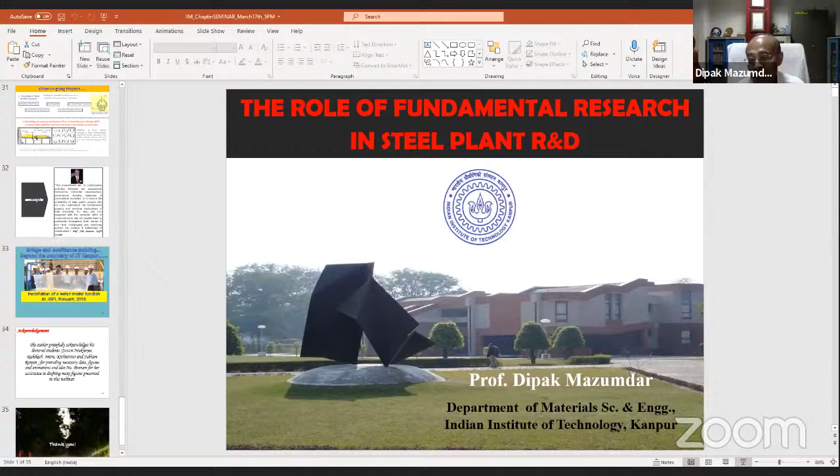As I project my slide, I'd like to say this talk is structured in three different segments, split over roughly equal duration, about 10 slides each, and I should be able to wind up in about 30-35 minutes or so.

This is the beautiful backdrop of the institute. I have projected the institute's logo throughout my slides at the top, because it is the name of the institute that has given me perhaps everything, including a holistic lifestyle in this wonderful campus.

If I move to the next slide, these are the three segments I was talking about. I will address our industry-supported steelmaking research activity at IIT Kanpur, briefly mentioning since when we started associating ourselves, which industries we cater to, what are the subjects, what is the goal of the research, and so on, for about 10 slides or so.

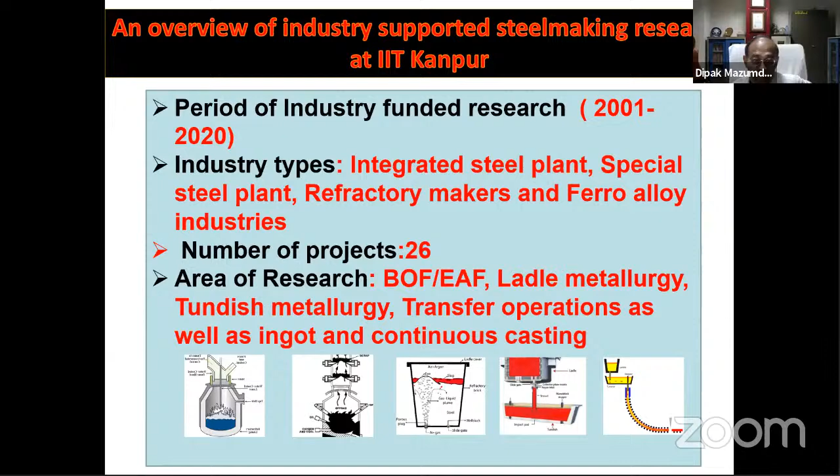If you look at our major collaborators, you can see there are several steel plants. These are our principal collaborators, meaning we have been funded by them with more than one project. For example, industries like Hospet Steel, JSPL, and Rashtriya Ispat Nigam have funded, I think, more than 4 or 5 projects each.

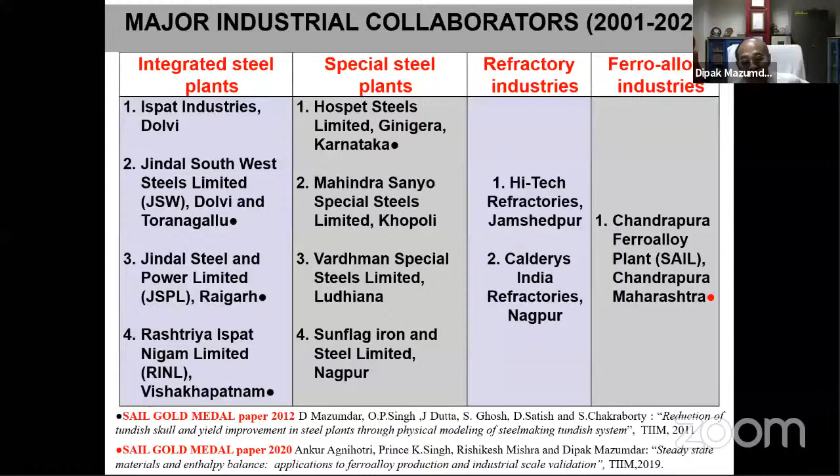These projects were not only challenging, they are very creative also. It is evident, as indicated below the table, that two of the works culminated with SAIL gold medals, which shows these are not mundane research. I do not have the time and scope to address each of these, but the two cases I deal with subsequently will give enough indication that these are indeed doable problems, challenging problems, and at the end of the day beneficial for both the professor and the industry.

The goal of the plant research has been, because it's an engineering activity, and engineering activities are concerned with wealth generation. If the exercise fails in generating wealth, it is a meaningless exercise as far as steel plants or any other industry is concerned. Because we are professors, we have to blend this business goal with an academic goal, and come up with projects which give us that intellectual feed essential for our survival.

So with a goal of enhancing steel mill production and process performance more specifically, we have addressed projects related to different topics: yield loss reduction, product cleanliness improvement, process time reduction, process optimization beyond yield loss, and energy as well as material audit.

These were not designed by me; these were industry-driven projects. They proposed the goal, and I had to deliver in a time-bound fashion. You can see I have put the logo of most of the steel industries with whom I have collaborated extensively, including primary integrated steel mills, special steel mills, and refractory mills.

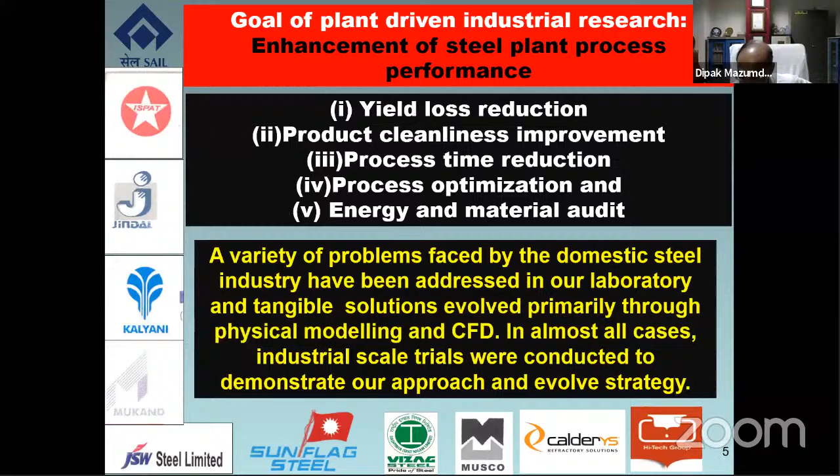But apart from these industry-funded research projects, I would like to mention that we have trained more than 800 shop floor engineers through continuing education activities that I had in Kanpur. I think this is a remarkable feat.

I would consider this more important, because as a teacher, I really enjoy delivering lectures before people who are working on the shop floor, who did not have a chance to see an excellent academic environment in an institute. I could bring them over, and the company funded them, sparing them for 2, 3, 4 days.

Today, I am very grateful that industry has stood solid behind us in supporting not only the research which culminates into money, but they have realized that generating knowledge is very important. Training their manpower and keeping them right at the front is very important. I think professors like us have a great role to play in taking the Indian industry forward, as far as the knowledge bank is concerned.

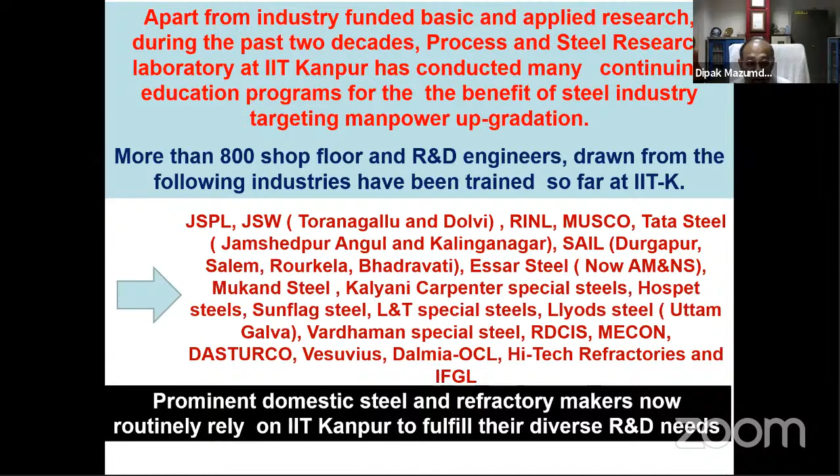If you superimpose the people who have come to IIT Kanpur from different organizations on a map of India, you could see that from throughout the country, people have come to take advantage of the expertise available at IIT Kanpur. I feel really privileged that in the last 20, 25 years, the industry has stood rock solid behind my activities, supporting industry-funded research as well as continuing education activities.

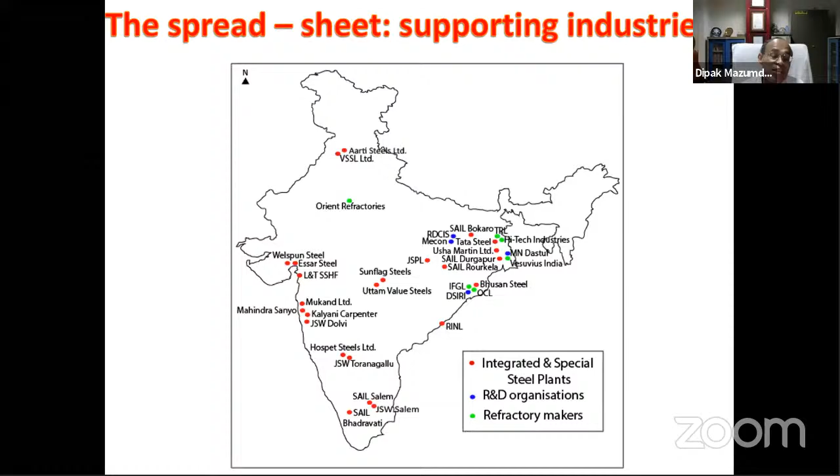Now, although we have done a lot of these exercises, I must mention that there are certain prerequisites in order to fulfill the ambitions and aspirations of the industry. It does not happen spontaneously. If you go to the next slide, we could see that for translational research, knowledge of manufacturing, measurements and modeling we consider as a prerequisite, or subject knowledge, which really is essential.

On top of that, it is very important to have a good modeler or researcher, not just one, as I'll show you in the subsequent slides, along with the necessary knowledge base, without which the concentration gets disturbed.

Professor Singh, could you mute everybody?

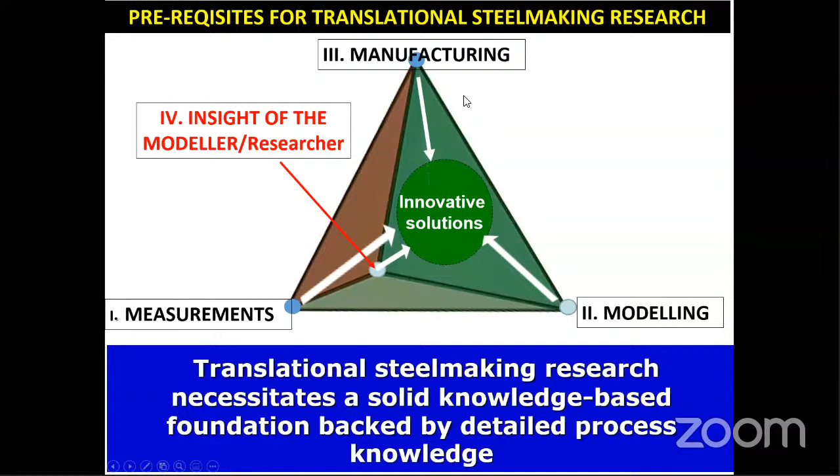For industrial research, to do translational research, I think a good knowledge base is necessary. That knowledge base is constituted by knowing the manufacturing details, which is steel making and allied subjects, having good idea about measurements because you have to carry out high temperature measurements, and also a reasonable expertise in modeling. Perhaps the insight of the modeler plays a great role here.

You may have noticed that when Professor Singh read my biodata, he said that I joined IIT Kanpur in 1987, but the first industry-funded serious project started in 2001, which means I had to get some experience. I had to lose a few hairs or turn my hair gray before the industry developed confidence in me. So that's what I meant.

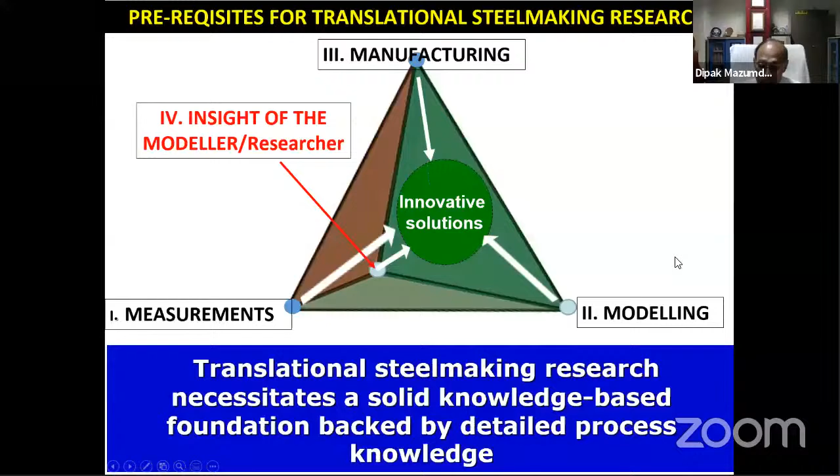With age comes experience, and that experience is very important as far as the insight of a modeler is concerned, combined with good subject knowledge. This is what it is: you have good knowledge of manufacturing, you have the science base of steel making, thermodynamics, metallurgical kinetics, and fundamentals.

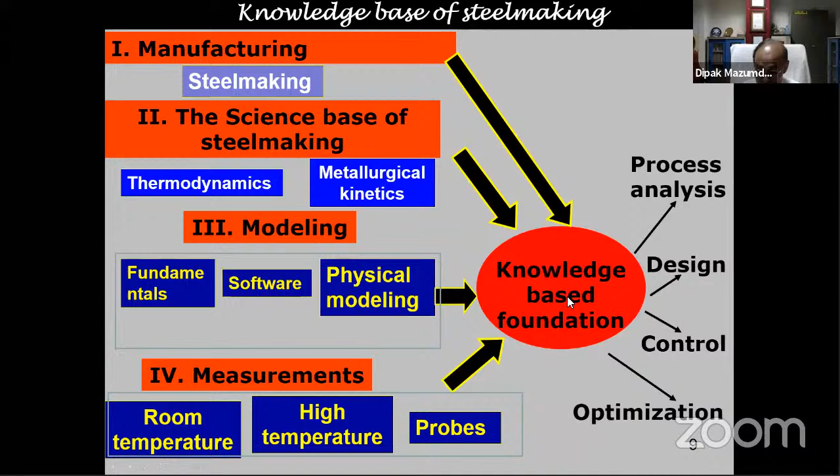These slides I have shown in many places. This knowledge base is necessary as a prerequisite for the researchers or the team of researchers. If you sum it up, you can do translational research and fulfill the ambitions of the industry and your own ambitions, provided knowledge, experience, adequate plant exposure, and a dedicated team is there. Without which, you will not be able to do any meaningful R&D that caters to design optimization and control of steel making processes at the industry scale.

So with this background, it is worthwhile to look into the two problems. I would like to summarize here that we have been able to do a lot of industry-funded work related to industrial production, etc. The support of the industry is very important in this.

I think professors have a great role to play here. Sitting in the office, I have realized, will not bring any industry closer. Once you start visiting the industry and become part of the team, that's how the confidence building starts. That's how the industry starts to realize your abilities, and that's how the industry opens their doors.

With their support only, I could make the steel industry a large full-scale laboratory for my research work, and it has been extremely gratifying. I would like to mention this specifically at this moment.

If I don't acknowledge here publicly the support given by the Ministry of Steel throughout my professional career, and the support extended to me by the domestic steel and refractory industries, I would have been nowhere. So I sincerely acknowledge their assistance in shaping my professional career in this country.

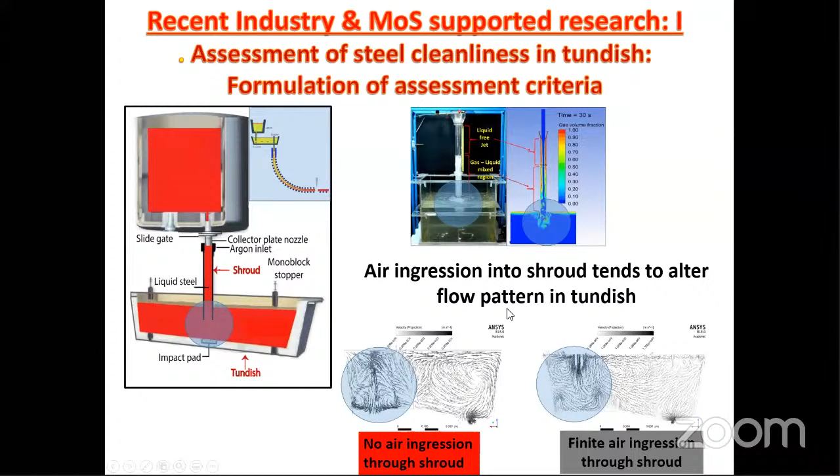So there's huge interaction between the atmospheric air and molten steel possible. And this molten steel is deoxidized, so it does not contain much dissolved oxygen. Apart from that, when air ingression occurs, there's a reversal of flow that takes place below the Tundish.

But that's not what I'm going to talk about. It's not so important as far as cleanliness of steel is concerned; it has only secondary influence. Nonetheless, the buoyancy exerted by entrained bubbles could disturb the flow, and this has been captured very realistically by carrying out numerical simulation. But that's not the entire story.

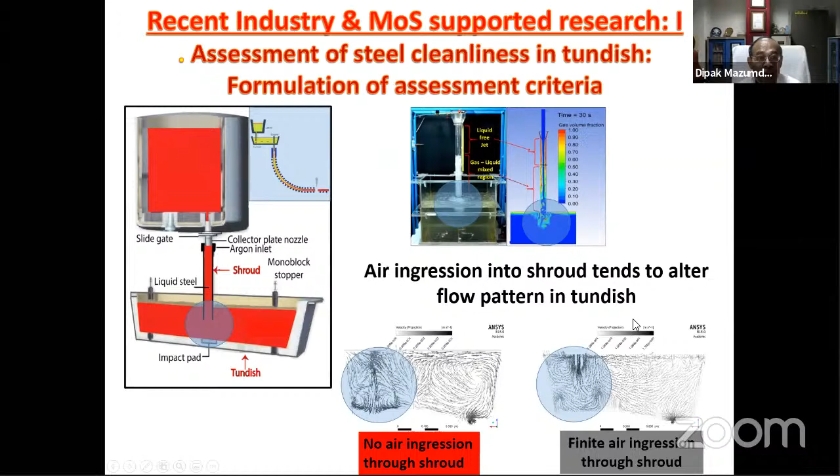Air ingression, when it takes place, the oxygen from the atmosphere gets dissolved in the melt. This dissolution is driven by a concentration gradient, because atmosphere contains oxygen at a partial pressure of 0.21 atmosphere, and steel could be containing 10 ppm, 15 ppm oxygen depending on the extent of deoxidation.

And the dissolved oxygen, when it exceeds a critical value, particularly in aluminum steel, it can react with aluminum to form alumina. This is a solid product, and this solid product acts as an inclusion unless it is removed.

Parallelly, you have dissolved aluminium, and if air ingression does not take place, we have Tundish powder, which contains silica. Silica is a less stable oxide, so aluminium reacts with silica through slag-metal reactions, as a result of which alumina is produced. So alumina can be generated in steel, and the cleanliness of steel can be impaired in the Tundish. So these are the reoxidation reactions.

As you can see here, I have plotted industrial measurements which show that the dissolved aluminum content at the VD lifting station is higher than the dissolved aluminum content at the solidified bloom. This axis is 400 and 400, and this is the 1:1 line. The points above the line essentially imply that we have more dissolved aluminum at the VD lifting station than at the solidified bloom, which means aluminum has undergone fading in the Tundish, or dissolved aluminum has been removed from the Tundish itself.

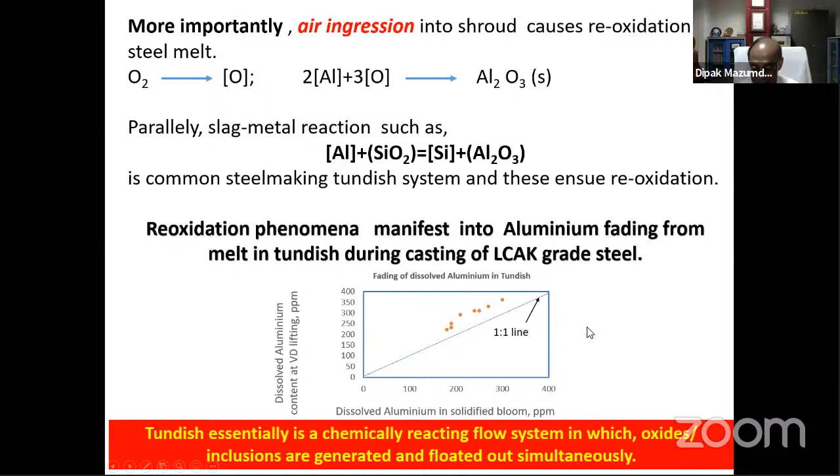So treating Tundish as an inert reactor is a gross simplification. I think we are in the 21st century, where steelmaking is 160 years old, and it is perhaps time to take into consideration the exact nature of the reactor in order to deliver what is required to be delivered.

Now, most of the time, we as academicians have compared Tundish designs by a popular way: using the residence time distribution curve, where we inject a dye, find its residence time distribution, get it done for two different Tundish designs, and then evaluate these curves to consider which Tundish has a better inclusion flotation capability. But this is not right, because it does not capture one of the intricate features of Tundish operation, which is reoxidation. So my assertion is that you can get a rough idea, but this is not going to be the true picture, or it can even be misleading in some cases.

Similarly, the cleanliness index in the steel industry, or flotation of non-metallic inclusion, is determined using this criteria. When we say aluminum insoluble, what does it mean? It means Al2O3, which is solid. In the bloom, divided by the aluminum insoluble or alumina content in VD, which means that if aluminum insoluble in VD equals aluminum insoluble in bloom, no inclusion has floated and the cleanliness index equals 1.

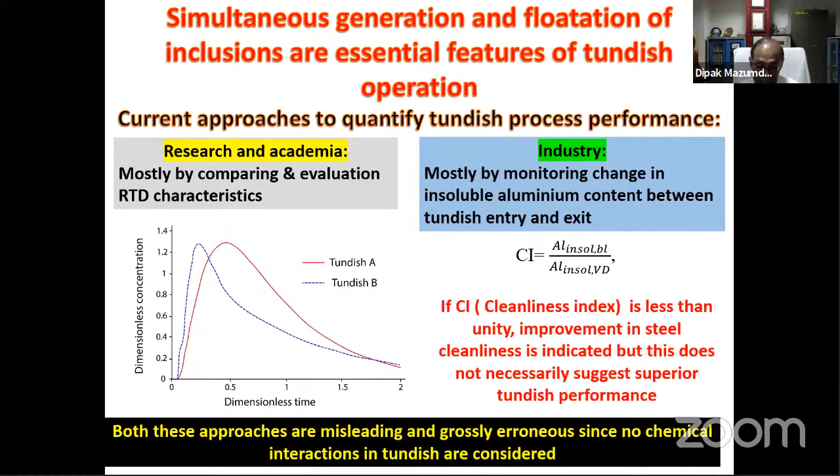But again, this has nothing to do with the reoxidation that takes place. So whatever academicians have been doing, or industry people have been adopting, to quantify Tundish process performance is not adequate, and we require better criteria in order to quantify Tundish process performance, particularly its ability to float inclusions.

When you do tundish processing, look at this figure showing dissolved nitrogen content in the tundish at the Vd lifting station for two different grades. As tundish filling starts, the dissolved nitrogen shoots up and then attains a steady state.

This indicates air ingression is taking place, because absorption of nitrogen essentially indicates that the melt has come in contact with the atmosphere. Along with nitrogen, a varied amount of oxygen also gets absorbed by the steel. Parallelly, as oxygen gets absorbed, we see aluminum fading from the steel and alumina generation, as shown in the earlier figure.

Now consider this process of alumina generation, particularly for aluminum-killed steel. By carrying out a simple high school level material balance, you can find three parameters: the generation index, the flotation index, and the total alumina loading in the tundish.

The total alumina loading in the tundish relates to the generation of inclusions, because whatever dissolved aluminum has faded, that delta has manifested as alumina formation. Similarly, the flotation part is a separate component. If you divide whatever has floated by the total inclusion loading, you get the flotation index, and these indices vary from 0 to 1.

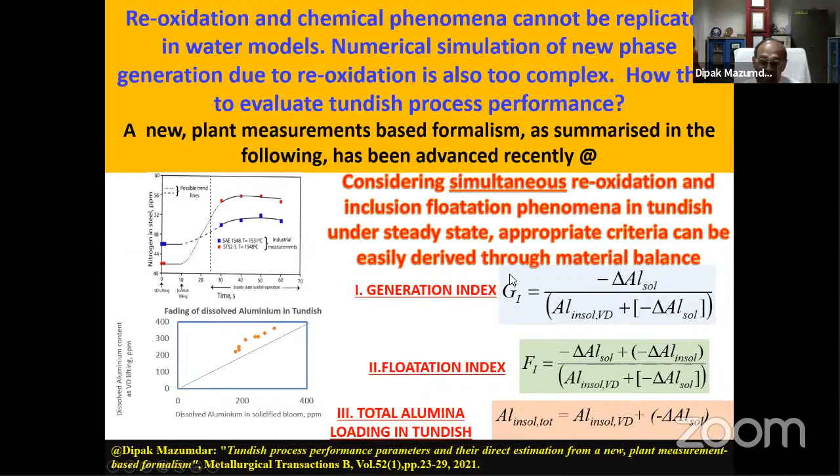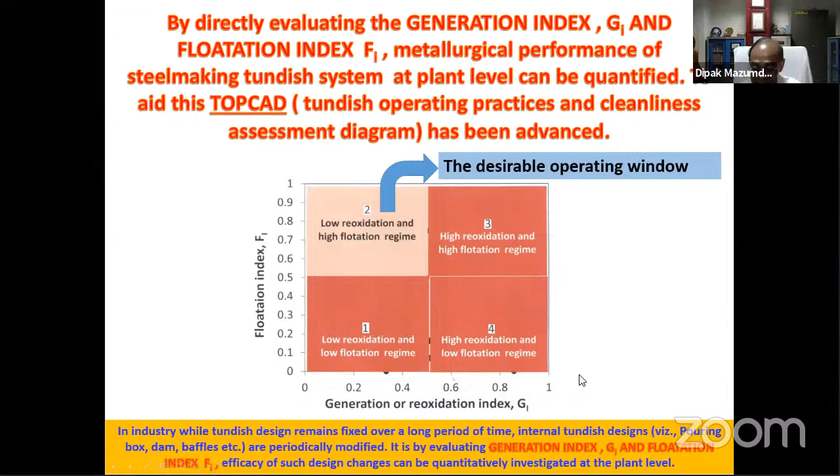If you plot industrial data from Indian steel plants, the figure is alarming. Only a few points fall in box number 2, while the bulk fall in box 3, the region of high generation and high flotation, which tells us the tundish is not working well as far as reoxidation is concerned. High flotation is there, but so is high generation, meaning reoxidation is a big problem in the Indian steelmaking system.

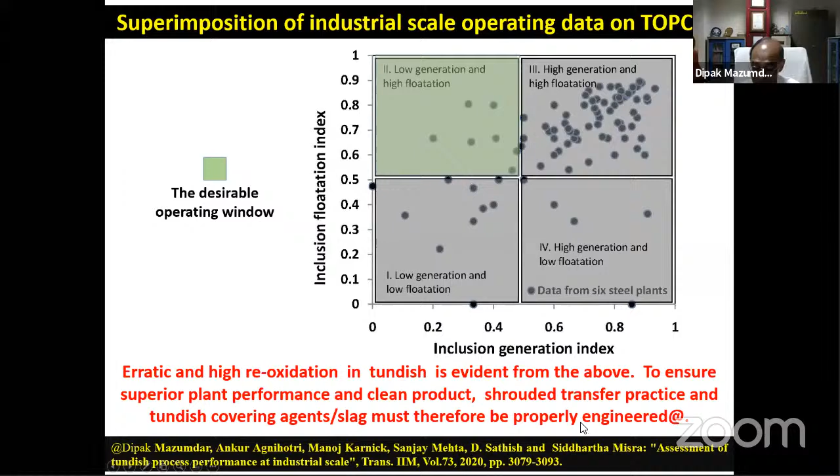This is recent work published in association with six different steel makers in the country. If you compare, for example, three special steel plants of the same size and capacity, there is quite a bit of difference in total inclusion loading—a huge range—showing that these plants are not able to control their process well. Otherwise, this value would have fallen in a narrow range.

Similarly, some steel plants are relatively better than others, where generation in the tundish is significantly higher. So we can draw a series of conclusions from the formulae advanced in this work.

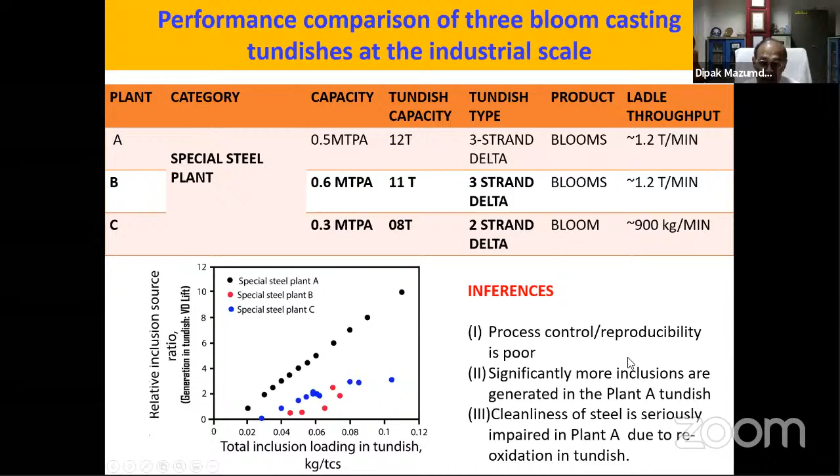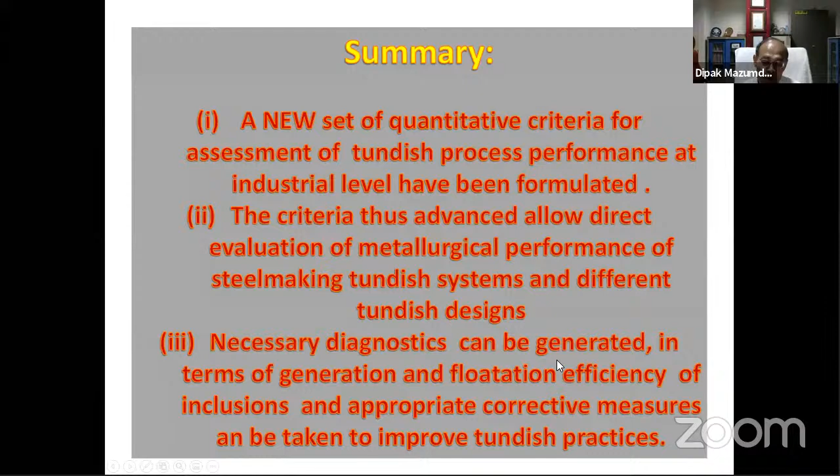I would like to summarize this by going to industry, visiting plants, making industrial measurements, and invoking a tundish level material balance with some process knowledge. We have formulated a new set of quantitative criteria for assessment of tundish process performance, which allows us to compare realistically different tundish designs and the performance of different tundish systems.

This is an interrelated part. Now we are looking globally at the tundish. Let us now look locally at the tundish shroud and collector nozzle joint, which I have highlighted here, and see what happens.

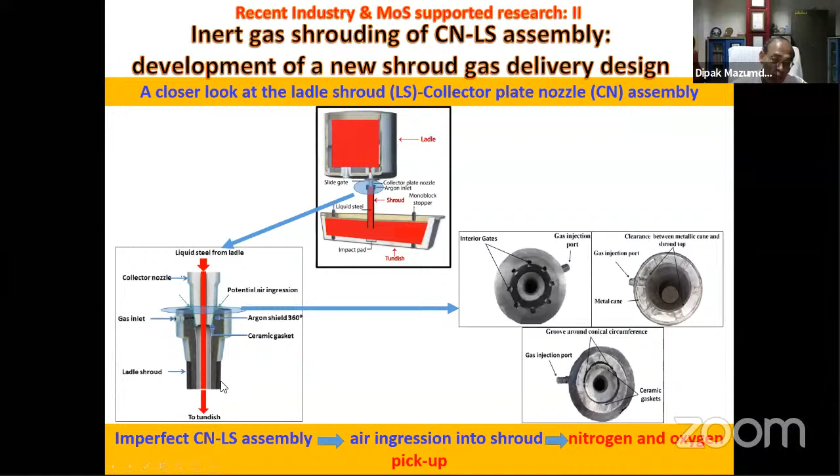This is the joint between two refractories, and this is the ladle shroud which is mounted onto the collector nozzle. You can mount it with a robotic arm, or you can have some kind of manipulator who can force fit the shroud into the collector plate nozzle.

If you look at this joint, it may not often be perfect. As a result, when you inject gases here, this gas tends to get distributed around the shroud collector nozzle joint. This gas is inert, and presumably provides some kind of shielding effect.

Here you can see the gas injection port. This design, the ladle shroud gas delivery design, is an 8-port design. Gas is injected here and comes out through these ports, resulting in a shrouding or circumferential distribution of argon around the shroud collector plate nozzle.

Similarly, there's another design, a metallic cane design, with a single discharge port and an external groove which allows argon to be delivered around the shroud collector nozzle assembly, so you do not get air ingression. If some gases escape, it will be argon, and that should not lead to reoxidation. That's the supposition—let us see whether it's legitimate.

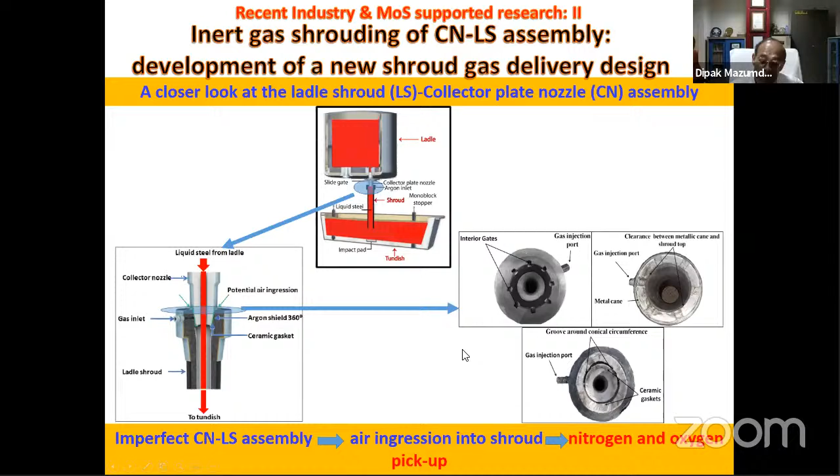An imperfect collector nozzle and ladle shroud assembly means air ingression is bound to happen, along with nitrogen and oxygen pickup, as we've seen in the aluminum fading graph illustrated earlier, leading to reoxidation. This is the collector plate, collector nozzle, and the ladle shroud, isolated here, with someone holding it off camera.

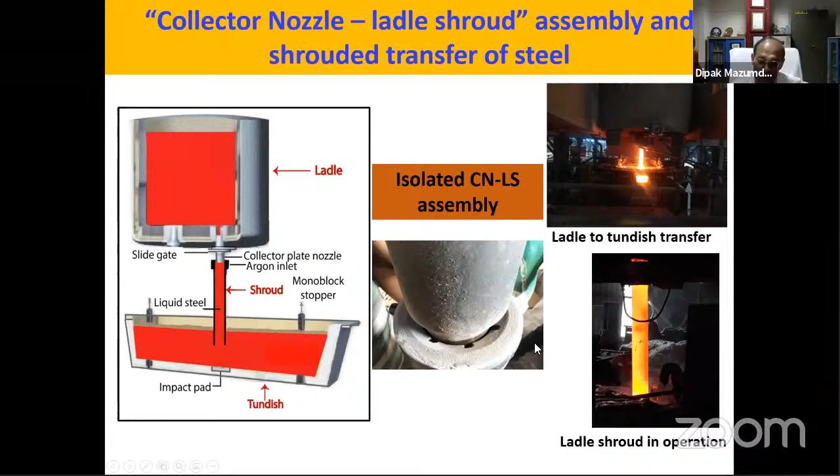This is the nozzle through which gas is injected, and through these ports the argon comes out. This shows the ladle shroud in operation in the steel plant, and this picture indicates how molten steel is transferred from the ladle into the continuous casting mould.

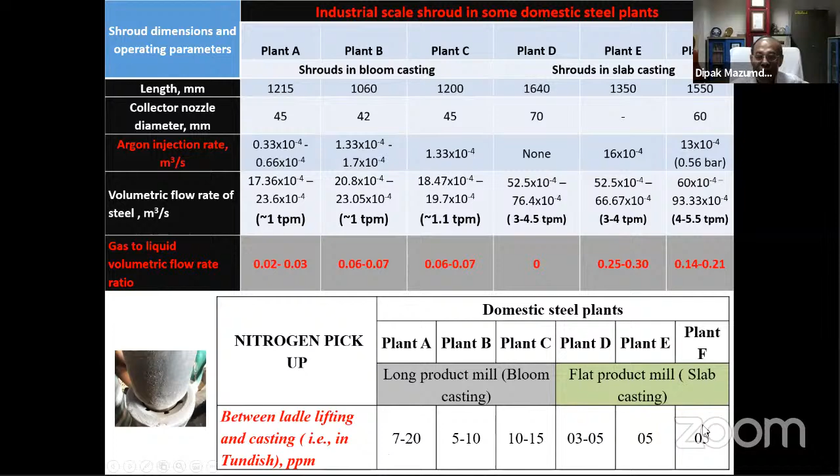You can see that regardless of whether there is no gas injection or varied gas injection, there is nitrogen pickup by the steel, which indicates that the shroud collector plate nozzle joint is rarely perfect in industry. Therefore some oxygen and nitrogen do get in, and this is manifested consistently across the 6 different steel plants considered.

To verify this, we carried out work—this is by my doctoral student—where we took cut pieces of ladle shroud of 3 different designs and carried out dye tracer distribution studies by submerging the actual shroud heads in a water bath, as indicated.

So you have the potassium permanganate injection system. You can say, sir, why are you using water as the fluid here, because it is argon gas? But we must understand that when you do simulation, if we maintain the inlet Reynolds number, whether it is air injection, water injection, or argon injection, if you maintain the similarity of inlet Reynolds number, then the curves overlap. The distribution of the gases or the liquid overlaps, as you can see here, which shows the distribution of water as well as argon. So we understand that we have to maintain that Reynolds similarity so that we can legitimize these water model studies.

But what it shows most interestingly is that, as we have found out, the argon distribution is not all with one port system. No matter what the argon delivery systems are, the argon distribution is far from circumferentially homogeneous. This part does not get any argon injection, for example. Here it is somewhat better, and here it is still better, but nonetheless there is no complete uniform encircling of the shroud collector plate nozzle by argon injection.

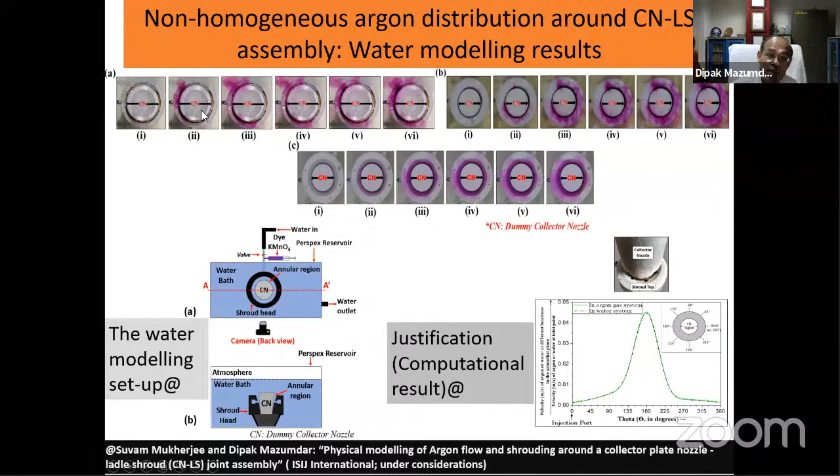So there is a problem here, and that problem is going to be much more serious when we are talking of this kind of shroud design. So to understand the air-water, air-argon distribution in an actual shroud system, you have a collector nozzle, and we have a ladle shroud. There's a section of it shown here. So gas is being injected here, and we want to find out, in this annular dome, what is the distribution of argon and air.

We have developed a model also, because these water model results may not be exactly applicable because the temperature effects, etc. are not there. So we have a species conservation equation which considers the distribution of two species in the system, air and argon. We have an energy conservation equation which takes into account the flow of gas in a hot shroud, because the shroud wall temperature could be something like 800 degrees centigrade. Then we have turbulent flow because the Reynolds number is high, and we have a 3-dimensional Navier-Stokes equation. We have calculated the flow distribution here and tried to find out the profile of argon, how much argon, and what is the distribution pattern of argon around this collector nozzle.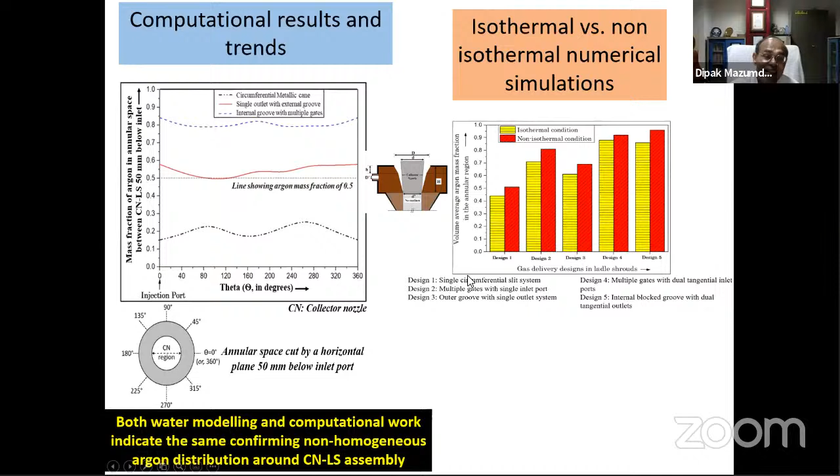So now if you try our new design, it gives us a significant enhancement, almost 95% of it. While these lines correspond to a single line, this is the volumetric average of argon in this annular region, so the total residual oxygen here is barely 5%. This shows that design 4 and design 5, developed in our laboratory by carrying out a large number of computational trials, tell us that the efficacy of argon distribution around the shroud collector nozzle can be considerably increased, and we can get almost the entire space filled with argon. That's what is desirable. Therefore, we conclude that gas distribution efficacy can be improved by changing the gas delivery designs.

I'll show you an animation, and then you can see, for example, how this blue essentially indicates that this is filled with air at time t equal to 0.

And now we have, when you start blowing argon through it, so argon is shown in red. You can see here, for example, this is one of the existing designs, and in the animation we don't get anywhere red except for this inlet nozzle, okay?

And if we plot here, this is our existing design versus new design, and you can see the rotational effect here. We have a tangential port here, so there is a rotation, and you can see the buildup of the gas. If you see, there it is green, which essentially means about 40-50% of it is going to be argon, and 50% is going to be oxygen.

On the other hand, if you look at the new designs, at this particular surface you have air present, so that's why you see some blue region, but bulk of that annular space between the collector nozzle and the shroud is red, which essentially indicates that this is filled with argon.

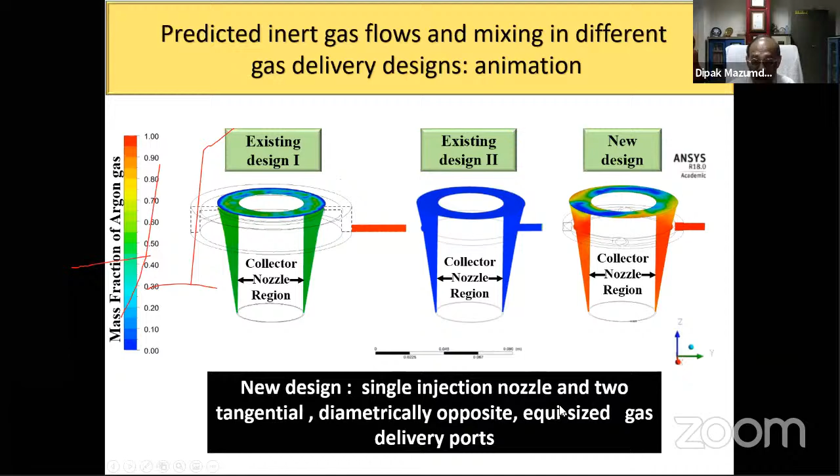And the summary of it is shown here: you have two different cases, the existing design, whether we go at the lower part, the intermediate part, or the top part, the existing design shows that nowhere is it a red region, there's only a little bit of argon, most of it is air.

On the other hand, the new design shows us that at the bottom part it is going to be red, or argon, at the intermediate part it is also going to be red, and somewhere at the top we can have about 90-95% of argon present there.

So it shows us that by changing the gas design facilities, which are very simple - this is not rocket science, this is high school level knowledge again - by reorienting the gas ports, the number of gas ports, their orientation, etc., one can really improve the distribution of argon around it.

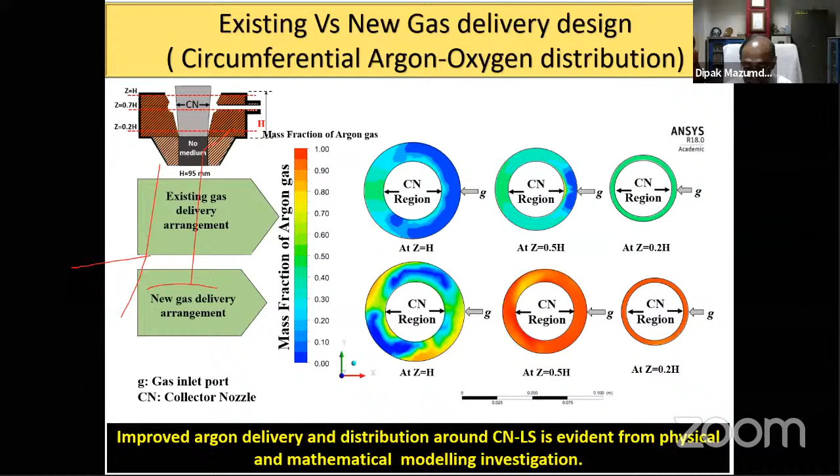So we have found this out in the laboratory. We have a design available to us, and now we are knocking at the door of the industry, and the industry has to come forward now to do this part.

And we found, fortunately, a nice partner, and that's what this particular work is about. The next two slides are going to cover this.

So we found a refractory manufacturer who was willing to make this refractory artifact, the ladle shrouds. We found a steel plant that was trying to minimize their atmospheric air absorption through ladle shrouds, so they were also keen to incorporate this shroud design.

So we made about 50 shrouds, brought them to our laboratory first, and we wanted to be sure that they could incorporate our design precisely. Having given the final clearance...

50 shrouds were manufactured by the refractory makers and shipped to the steel making industry, and they were deployed in trials. The trials were done in two different phases: one during the lockdown period, in November 2020, and the other during February 2021, which is still ongoing.

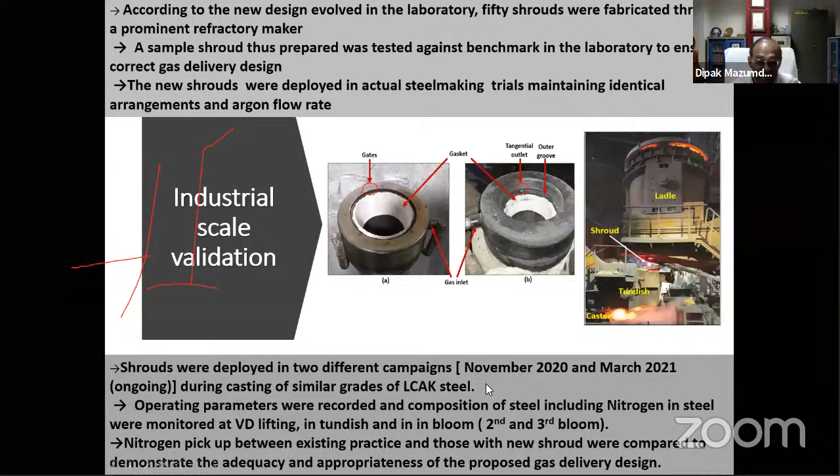And we monitored many things, including nitrogen absorption. All other process parameters were identical.

And if you look at the nitrogen - what are these lines here? I think somebody shared their screen at some point. Okay.

So this is the existing design. I have kept deliberately three figures: this is campaign one, this is the ongoing campaign, and this is the existing shroud practice. And this is the nitrogen pickup in Tundish.

I kept this axis deliberately the same, up to 60 ppm nitrogen. We have got a maximum of 55 ppm. And if you look at the existing practice, the average is about 25 ppm, and look at the scatter.

Now you go to the new campaign with our new shroud design: from 24.5, it has come down to 9 ppm. We have only done 9 trials so far.

These are the 18 points, the same set of points, where we have taken both Bloom 2 and Bloom 3 data, and that's why we have about 18 data sets. That's why you see this pattern being replicated here also - it's the same set of data, but with respect to Bloom 2 and Bloom 3.

This also essentially indicates that we have about 12 ppm of nitrogen pickup, because the data set is small. So I think this 12 ppm can go down further, to 8 or 9 ppm, once we have a larger number of data points and so on.

Now we must understand that at this particular stage, we have just changed our ladle shroud. There are two more things: the mechanical issues need to be sorted out, and the argon flow rate. I am sure once we incorporate these two additional aspects into steelmaking practice, the transfer operation from ladle to tundish figure can come down to 1 to 8 ppm, which is the global average. And that is the real challenge, which we will be working on in the next couple of months when I visit the industry.

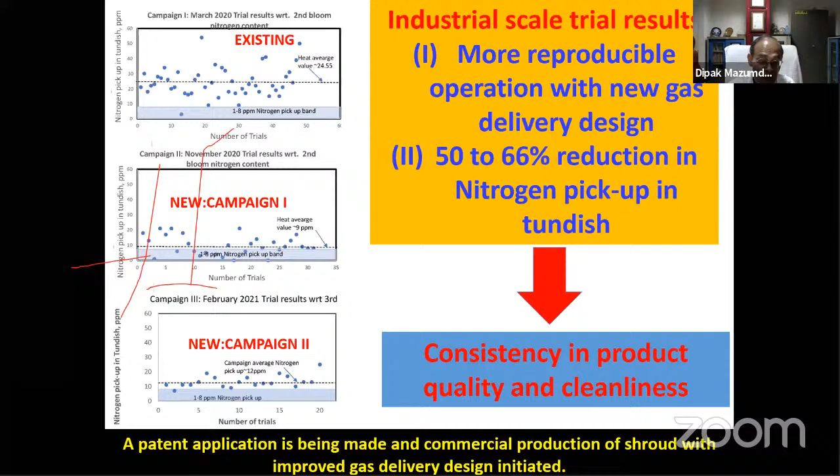So in summary: existing ladle shroud inert gas delivery systems are largely inadequate, which we have demonstrated through physical and mathematical modeling, and they do not ensure homogeneous argon distribution, which has also been shown. We have found a design of water model and ladle shroud gas delivery system which works well and ensures better argon distribution around the shroud collector nozzle.

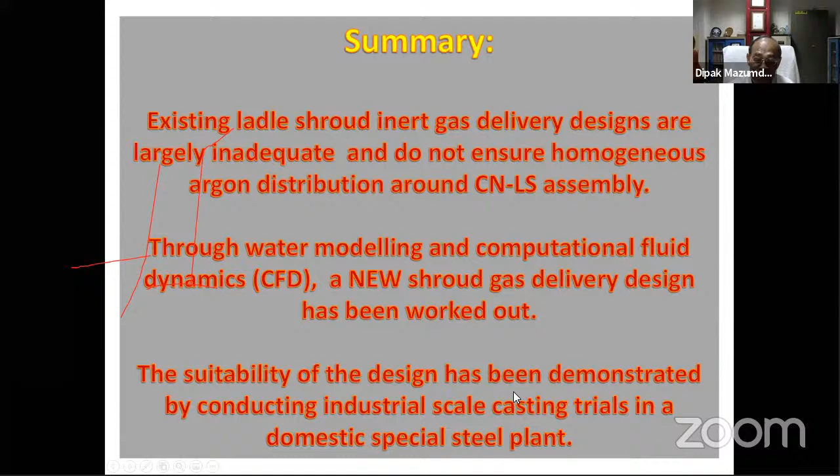And we have demonstrated this by conducting industrial scale trials. I see that the proactive role of the industry is extremely important, and that trust needs to be developed over the years. It doesn't happen, as I have been saying throughout, overnight. So I've been very happy that these ideas could be crystallized or given final shape by conducting trials in the industry, where industry has a big role to play.

I just want to show the ongoing projects that we are trying to do. One project is, because I'm trying to look for an industrial partner. You know that in continuous casting, we have bloom cast, and we have what is known as an electromagnetic stirrer to introduce stirring into the bloom casting mould. The recent trend is that this is a very expensive affair, to have an electromagnetic stirrer.

If you have a gyro nozzle, a specific design nozzle with which we can impart rotational flow, more or less similar to that introduced into hot steel by electromagnetic stirring, then we are trying to design an optimum gyro nozzle for delivery of molten metal into the continuous casting mould. So it's a combined magneto-hydrodynamic and reaction engineering modeling.

And we want to extrapolate those electromagnetic flows to the domestic steel makers, particularly the induction steel producing sector, whereby we can tell them what is the rate of decarburization and what is the extent of nitrogen pickup by the melt, and so on and so forth.

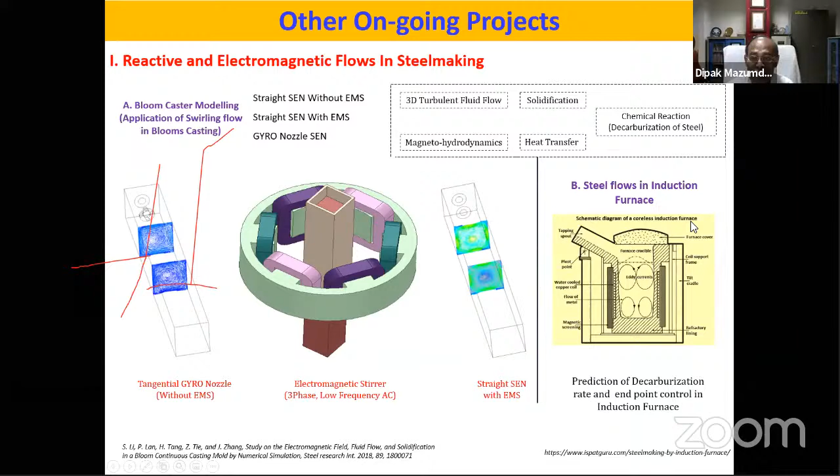We would like to further explore the concept of tangential gas-driven gas inlet ports in the context of the AOD converter. Again, we are trying to look at some kind of industry support, and the objective here is to basically introduce a swirling flow in the converter, whereby the tap-to-tap time can be significantly reduced. This would mean huge generation of revenue for the stainless steel making sector.

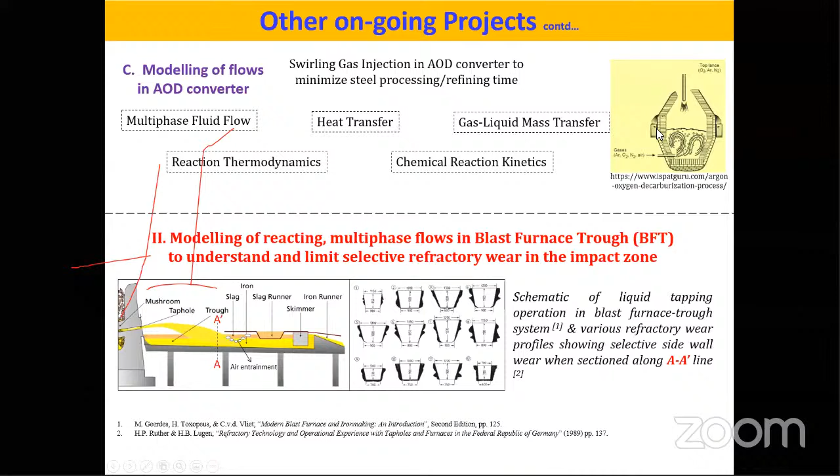And this is the first and perhaps the last ironmaking project that I'm trying to deal with: to simulate the refractory wear phenomena, which again is a heat transfer, mass transfer, fluid dynamics controlled phenomenon. Here also, fortunately, we have a supporter, Calderys Refractories, who is interested in supporting this activity. So these are some of the works that we are trying to do. And I hope, before I retire, this work will see the light of day and will contribute to the welfare of the steel industry.

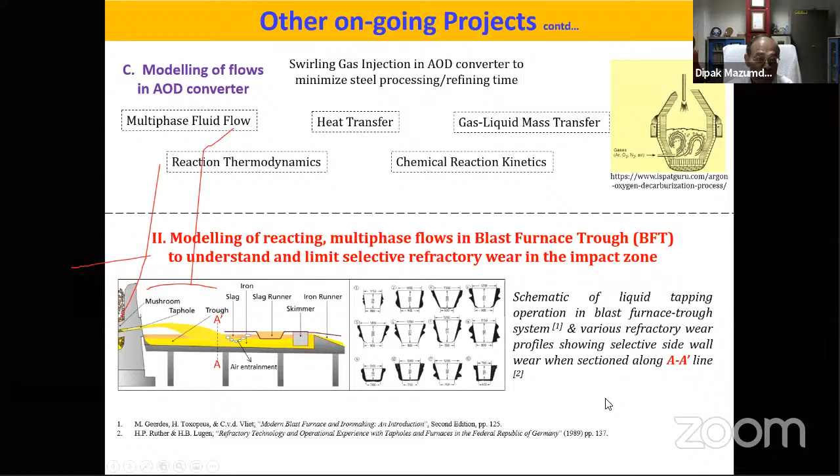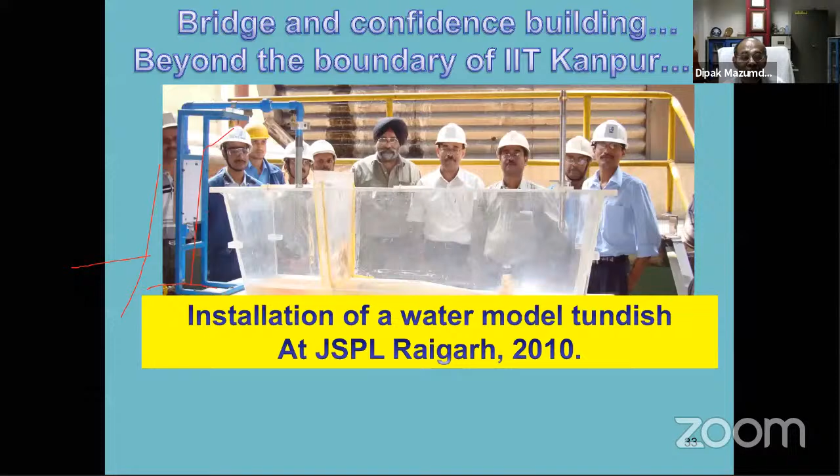This is our effort to build confidence beyond the boundary of IIT Kanpur. This is a water modeling exercise. And the work that I have presented today could not have been possible without the assistance of all my graduate students, my doctoral students. I sincerely admire their sincerity, their diligence, and on top of that, helping me to structure this presentation in an elegant way. Thank you very much.